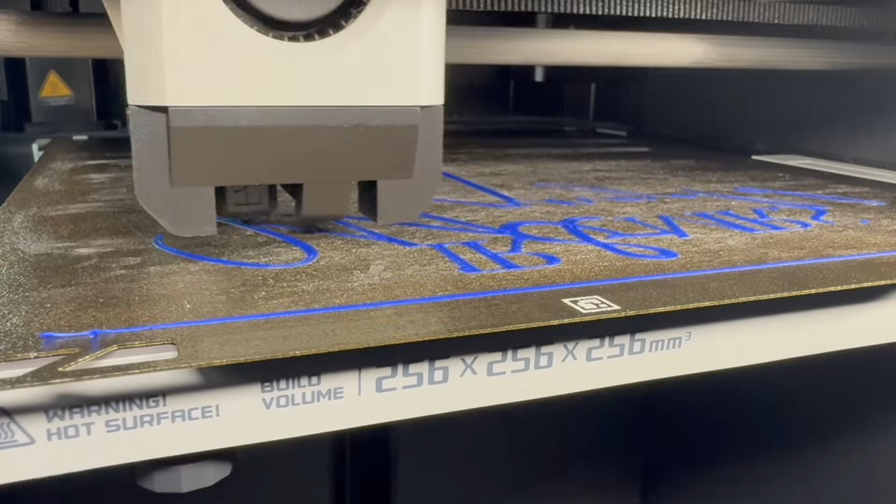Do you actually need to know how to use Fusion 360 to make some side gig money? Short answer is no. You don't need to be an engineer or master this whole program. You just need to know enough to make something people will be willing to pay for. So let me prove it.

I'm going to design a simple part from scratch, print it, and show you how a skill like this turns into real money on the side. Something like this - this is a cake topper that my friend asked me to make for her upcoming wedding. So let's jump into Fusion 360 and I'll show you how I did that.

When importing into Fusion 360, there's one important aspect you need to keep in mind. When you import anything external, Fusion really doesn't know how large the object is, so you need to predetermine a scale you'd like it to be as you're importing it. You can always change it later, but something I like to do is establish what scale I want to work with prior to bringing it into Fusion.

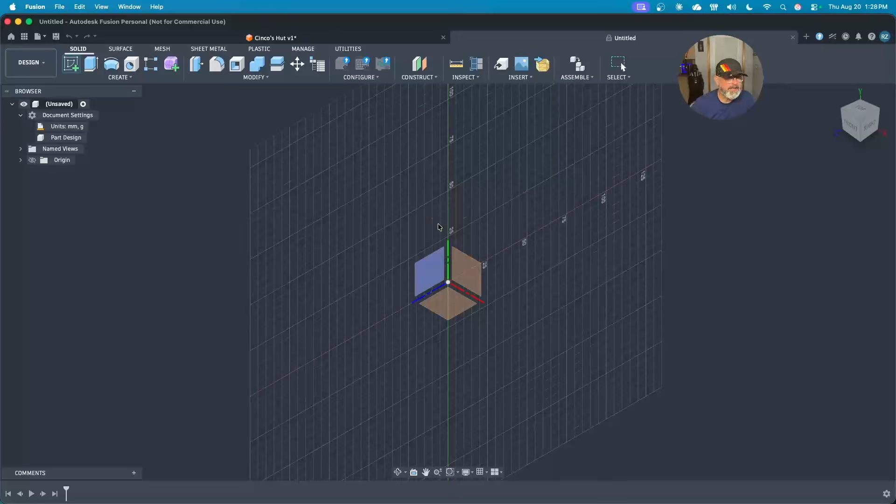The way I do that is I start with a sketch up here, top left corner. It's asking me to select a profile to draw on, so I'm going to pick that profile here. Very simply, I just want to establish what you might call a canvas, something that's already sized appropriately based on what I'm trying to make.

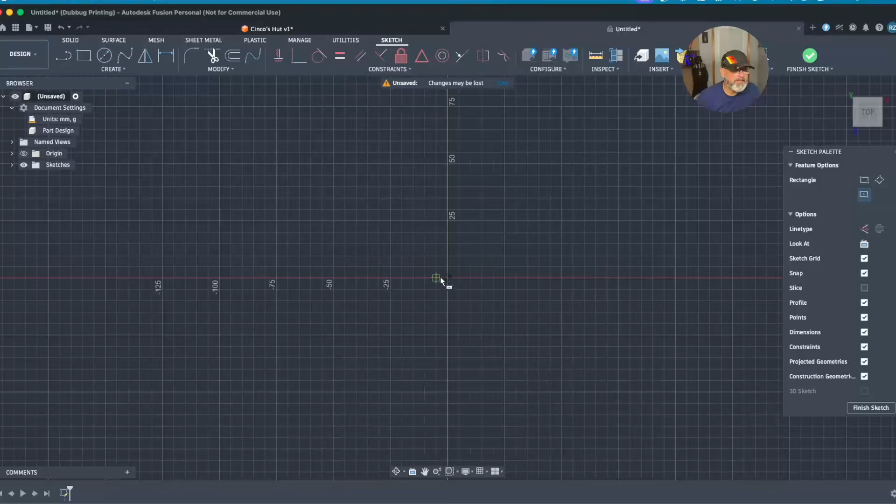So I'm going to come up to my sketch tool, drop this create dropdown, select rectangle, center rectangle. This allows me to snap to the center of my sketch, click and drag out. It lets me dimension a rectangle sized appropriately to the part I'm trying to make. I know my cake topper is 85 millimeters tall and 190 millimeters wide. Once you have your two dimensions in, you can press enter and now you just have a simple rectangle.

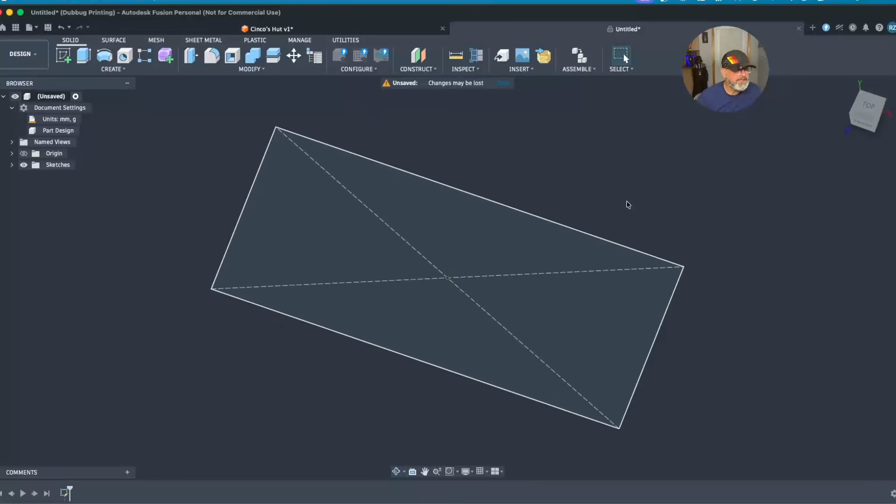You come over here and finish your sketch. Once I import my image, I'm going to try and scale and size it to this rectangle because I know it's already a known dimension.

Now I'm going to bring in my SVG file, create another sketch by coming up here and clicking sketch. Instead of selecting a profile down here, I'm actually going to select the rectangle that I just drew. I'm going to come up here where it says insert, drop this down and insert SVG. I'm going to come to my computer, and here I have cake topper. If I zoom out here, you can see that the import came in fairly large.

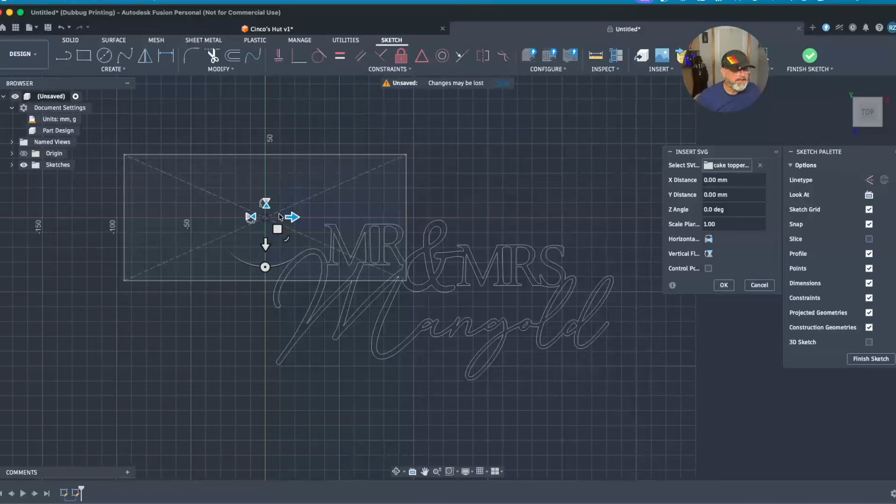The nice thing about Fusion is I can manipulate this import in many different ways. I can flip it upside down, I can mirror it, I can move it left, up, down, anywhere I want to move it. I can keep it on that plane, horizontally, vertically.

One really cool feature is I can slide this drag tool in and out and it changes the scale. But if you think about it, if you don't have this rectangle that we drew to start, I could drag this way out and really not know how big this is. I would have to dimension it later, establish what size this is once I accept the import.

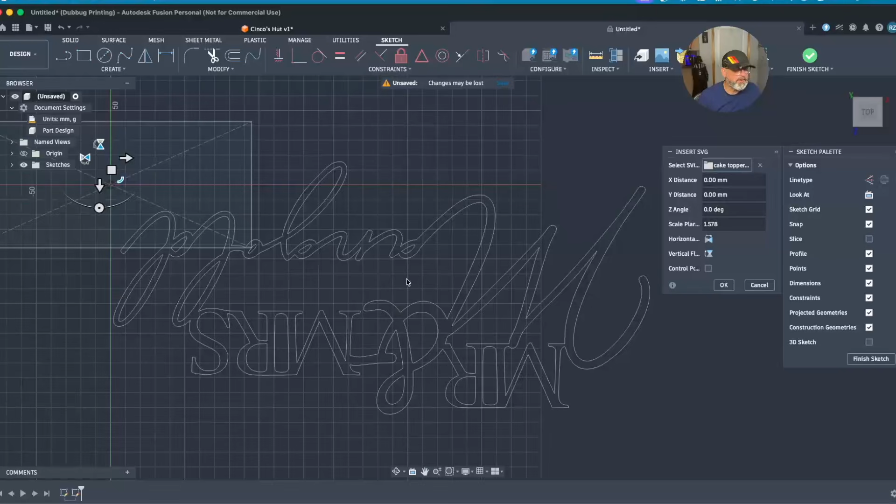Or I can scale it way in, and if I'm zoomed in on my Fusion screen, you can see again, you don't really have a good way to tell how large this is. So that's why I like to draw this rectangle in the background to establish my scale right when I import.

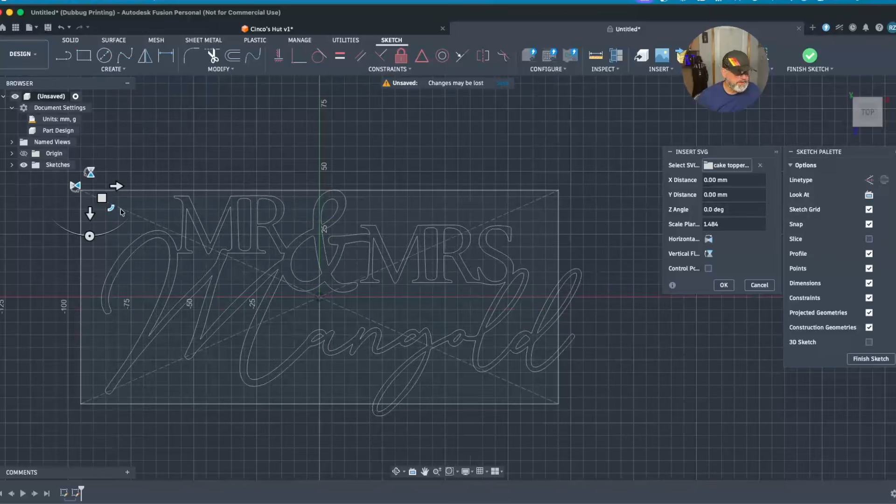So now that I have the rectangle in place, I have the SVG in the direction I want it to print, and I can stretch this out just to fit inside this box that I drew. Doesn't have to be perfect, it just has to be close. Right there, you can see I'm inside the rectangle. I'm a little outside here, almost up against it here, and almost up against it here. That's close enough.

So I hit OK, it accepts that SVG as now a sketch, and now I have the words that I'm trying to print along with my original rectangle. I'm going to finish this sketch.

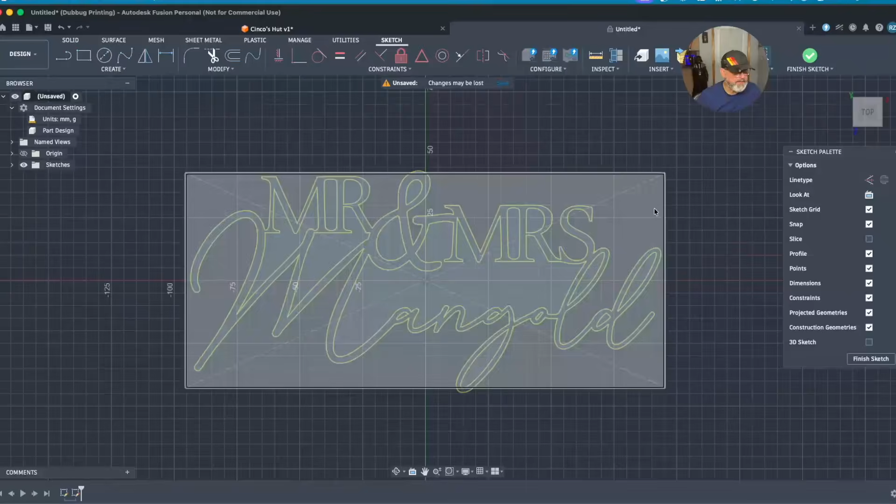Over here in the history of this project, I have two sketches now: one is the rectangle and one is my import. I don't really need the rectangle anymore, so I can shut that off and hide it. Here I have the actual wording that I'm looking for.

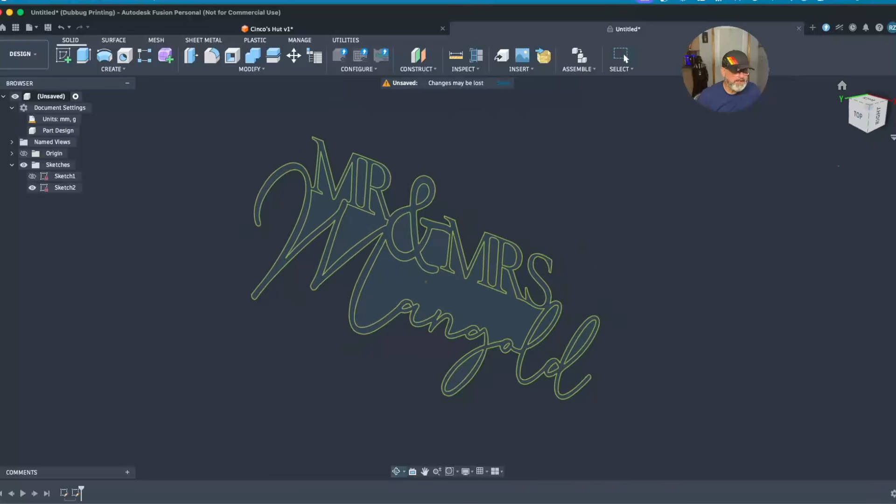I can manipulate this in space, flip it all around, look at it in 3 dimensions, but as it sits right now, it's still 2 dimensions. And as I manipulate my drawing, my cube is also equally being manipulated.

I'm using a shortcut key on my keyboard to hold the drawing and manipulate it. This cube, if you don't use any shortcut keys, you can hit these arrows. It's pointing to this other side of the cube, right? You can go left, flip it up and right. You can rotate it all the way around, right?

I want to look at it this way, upside down, if I want to look at it so I can read it, right? So you can do a lot of manipulation of your drawing just by understanding how this cube works. This little home button kind of brings you back to an isometric view if you ever get lost. If you want to just look at it 2-dimensionally, it's facing you now.

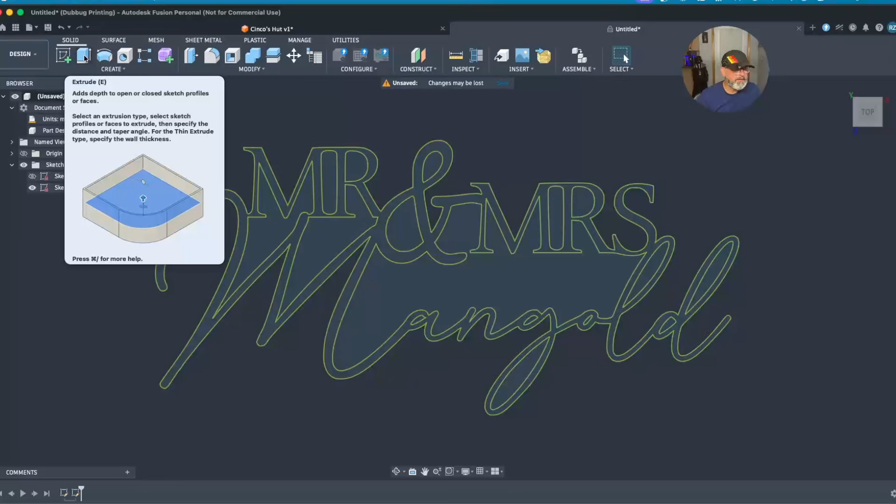All I really need to do is give this some dimension. There's no depth to this. To do that, you're going to come to this option right here, it's called extrude. This dialog box pops up. If you just work your way from top to bottom, it's asking you to select a profile.

So I want to select the words to extrude. But if you look, as I drag through here, you can see these other areas are lighting up and highlighting. How an extrude works is it's looking for any closed loop sketch, like in the L hole here, or the A hole. Everywhere there's a complete loop, it's looking to extrude that section. So you always want to make sure you're selecting the right sketch or profile to extrude.

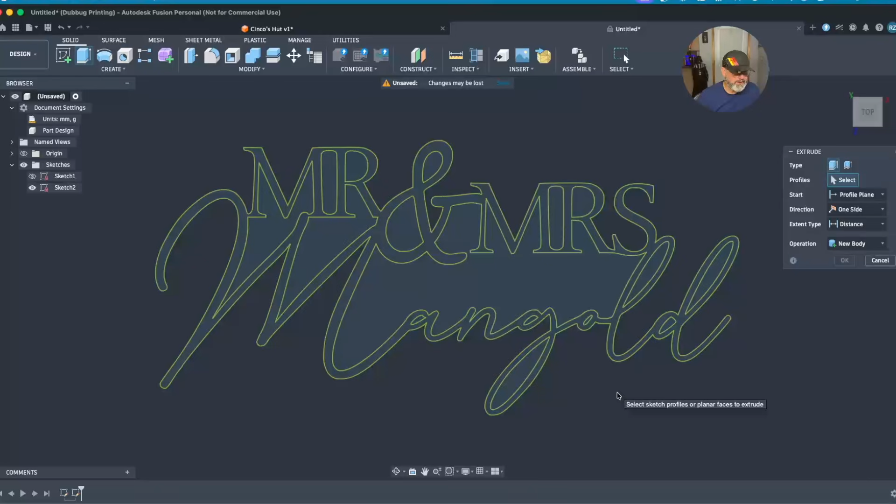A lot of times I like to zoom in a little bit just to make sure I grab the right part. You can accidentally select that L where that should be void, and if you select it accidentally, it will extrude that along with the words. So you have to always be mindful of what you're selecting here.

Another little dialog box pops up with a distance that you want to extrude. I want to make this 4 millimeters. Over here in your dialog box, there's my distance, 4 millimeters. Right now, we're going to leave the taper angle as 0, and the operation is new body. I'll touch on that in a later extrusion. So you want to click OK or hit enter.

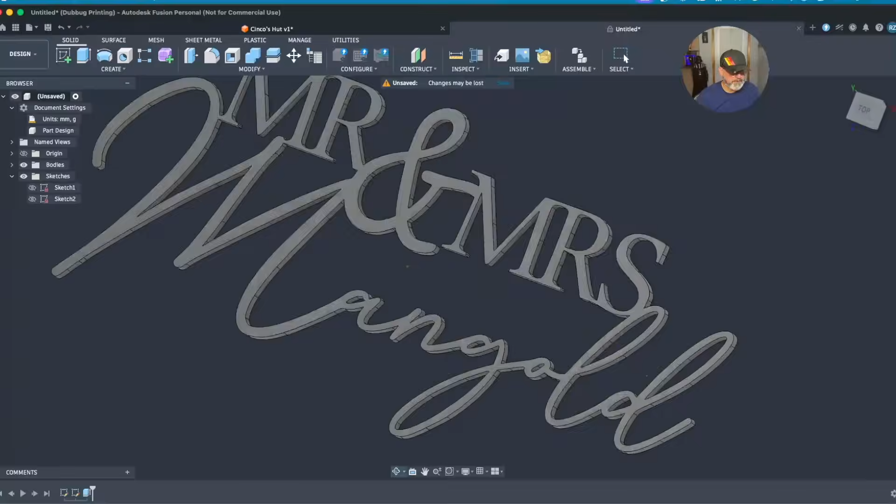And now if you manipulate your drawing in space, instead of a 2-dimensional sketch, I have a 3-dimensional part. All I have left to do is add that section that's going to get stuck into the cake. And to do that, I don't have to import anything, I can freehand that right inside Fusion here.

So I'm going to come back up to my sketch tool, click sketch. Again, it's going to show me those same 3 planes as it always gives you when you click a sketch. And I don't want to click one of those planes, I want to start my sketch right on the existing 3-dimensional part. So I click the top of that, zoom really close here. This is where I know is about center of my part.

I'm going to come back up here to this create drop down. This time I'm going to select a 2-point rectangle. I'm going to come over here, drag this across. I want to make this 100 millimeters long and again 4 millimeters wide. When you hit enter, now you can see if I zoom out here, you can see there's my sketch.

It's just a simple rectangle that's drawn right on top of my 3-dimensional part. I'm going to come over here, finish sketch. This section I just drew is 2-dimensional, and my part up here is 3-dimensional. I need to extrude this part similar to how I extruded the words.

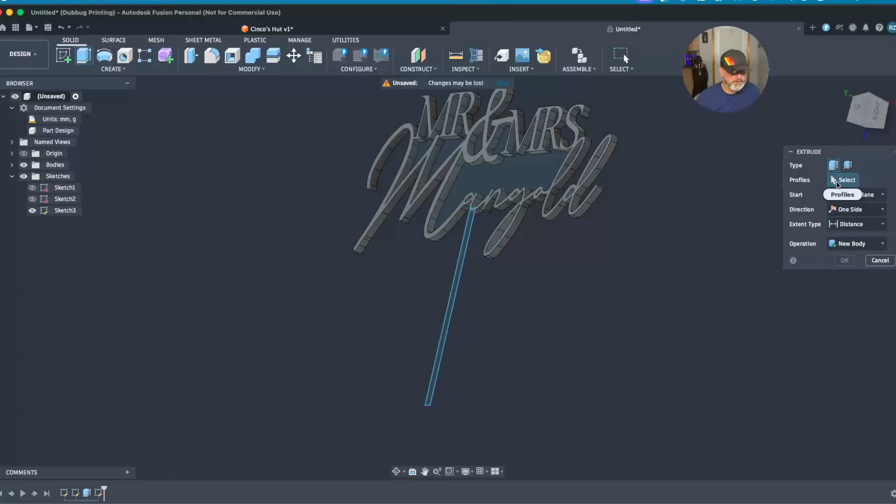So once again, you come up to this extrude option. It's asking what type of extrude, so I'm going to do a full extrude. And it's saying again, what profile would you like to select along with that section there. Here's where you have a couple options to choose from.

Let's say I didn't know the thickness of this original part. I do know it's 4 millimeter because I just extruded it, but let's just say I didn't know that. If you come to this extent type, instead of a distance where it allows you to type in an exact dimension, if you open this up, it gives you this to object option.

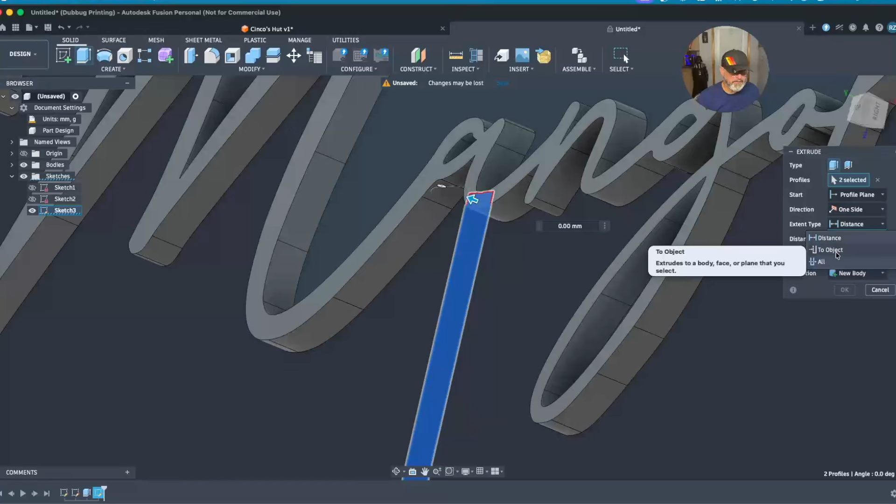If I select that and just simply turn my part around in space, so now I'm looking at the back of it, and I select the backside, what you'll see is the extrusion will stop at the face that I've selected. So it automatically goes to the back of this part because I've selected that surface.

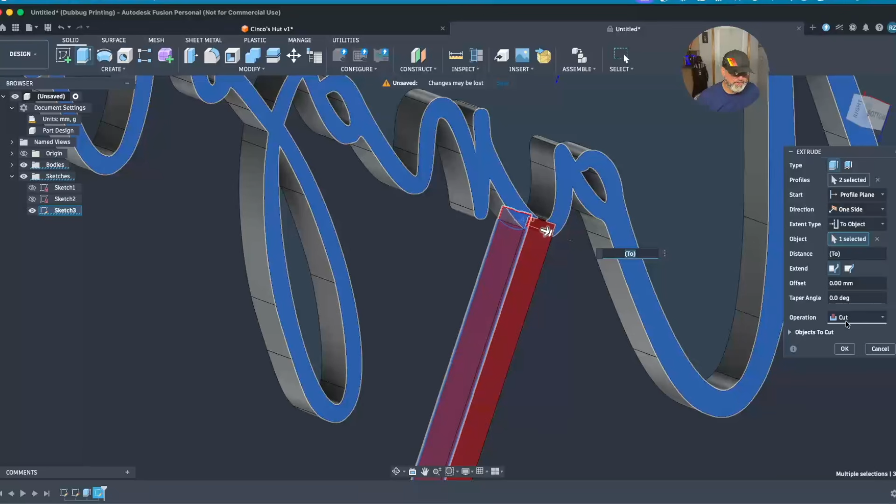But if you look, it's red. It didn't really extrude it, it actually cut that section out of my original part. You come down to this operation, you can see that it's set to cut right now. If I do a join, now it does an extrude into the existing. Hit OK, and you can see it's all one part now.

If I hit top, zoom out, you can see now I have the part I showed you at the intro. That's pretty much it, I've only scratched the surface on what Fusion can do. My goal here is to show you how easy it can be making custom 3D prints using Fusion 360.

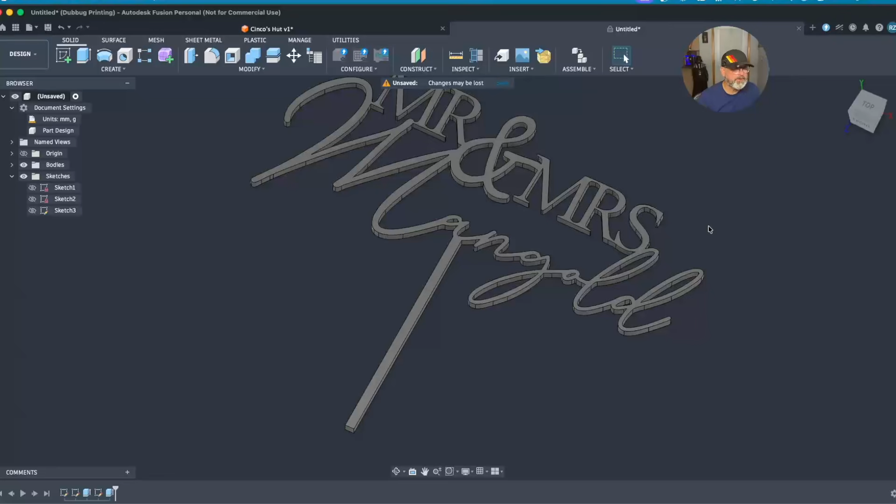So at this point, if you haven't done so already, save your project so it's not lost. Saving your project is a very good practice to do, especially if you're doing a more complex drawing or part. You want to save it as you go.

Now that it's saved, I can right-click on the actual object in the list here. I want to save it as a mesh. And when I come over here to my print utility, my application's already selected as Bambu Studio. It's going to export it as a 3MF file.

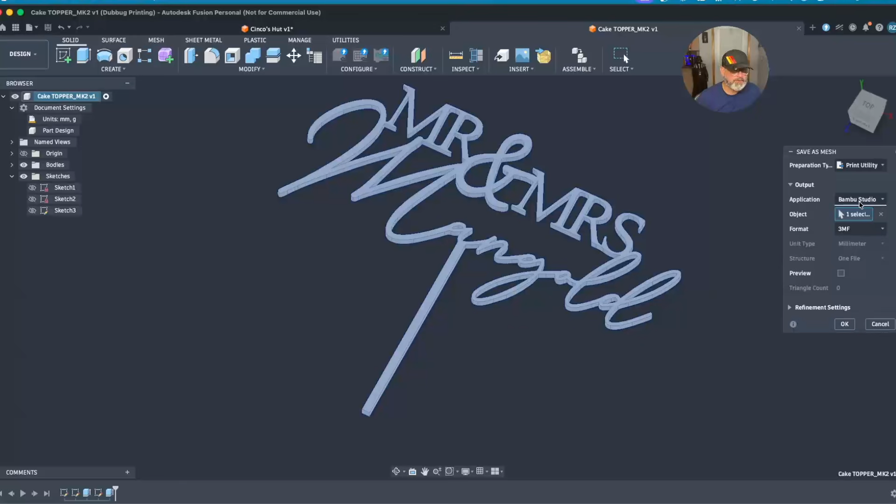Bambu Studio will open, and I don't want to print it in this orientation. I want to select this option here that's called Lay on Face, and I'm going to lay it down on the print bed. This is how I would like to print it.

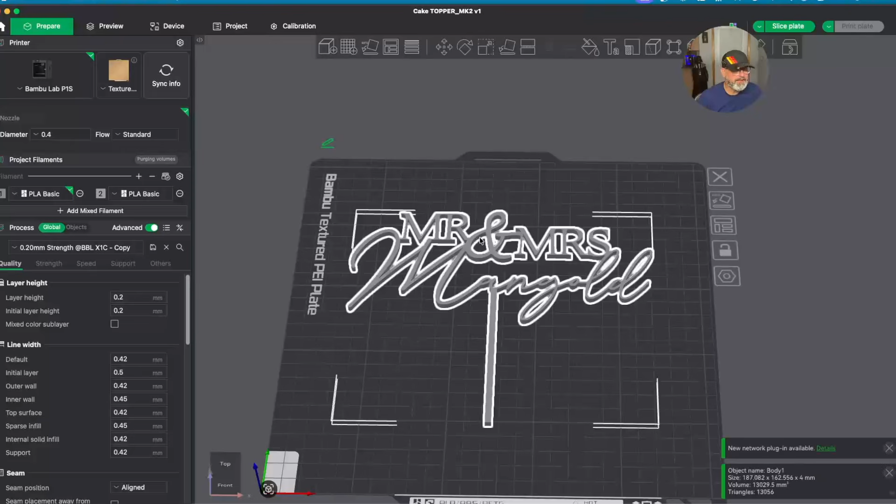Anyone who does 3D printing knows that the face printed on the actual print plate comes out looking nicer with a nice texture. So what I'm going to do is just reselect this object, pick that lay on face feature again, and then select the face that I want it to lay on, which will then just flip it over. Now it'll print with the first layer on the print plate, that's going to be the nicer side. When someone's reading this, it'll have a nice texture on the front.

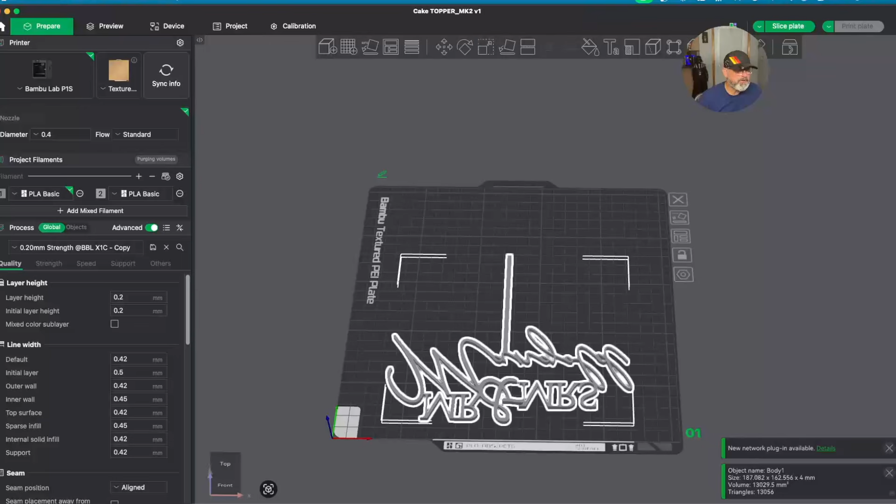Okay, so now that I have the print sitting on the right face I'd want to print off of, I'm going to use the standard strength default option. Right here, we're going to hit slice, and you can see it's taking about 50 minutes. I'm going to hit print, select the color that I want, and hit send. And that's it, it'll send off to my printer and start printing.

Check out this pretty cool time lapse.

Do you need to master Fusion 360? No, you just need to know enough to make something people want. And you just watched how little that takes.